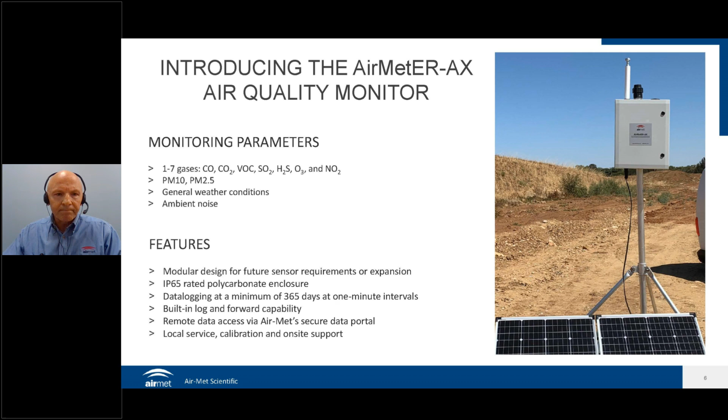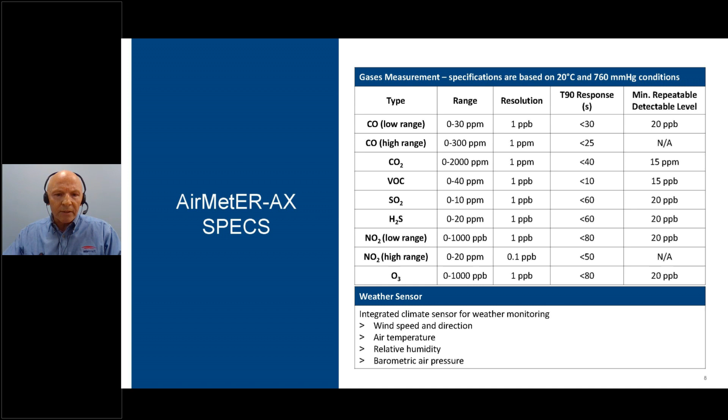Just some key features or aspects of the unit. It features a PM2.5 and PM10 sensor with a range of 0 to 999 micrograms per cubic metre. We also feature a high and low range option for CO and NO2 sensors, amongst the range of various sensors you can see there that are currently available. We can also integrate the weather station and also a noise monitor if required.

The ER-AX is housed in a polycarbonate enclosure which only weighs 11 kilos, so it can easily be mounted on a pole or a tripod, depending on your application. Because the instrument is made and assembled locally here in Melbourne, our customers will benefit from local service and local calibration. So this is going to minimise your downtime and of course minimise the associated costs.

So I'm now going to touch on a couple of case studies. The first case study is a remediation site which is currently operating in Melbourne. I can't go into too much detail in terms of location or other details because it needs to remain confidential. However, to give you an idea, our client's customer is in the process of digging up and removing heavily contaminated soil from a site that was once occupied by a chemical storage facility.

So the concern from our client's customer was the potential migration of the contaminated soil due to the works being carried out on the site. They're worried that this may migrate into the neighbouring community and cause a health and safety problem. So what was required was monitoring of the 4 boundaries for VOCs and particulates. They also required a weather station for wind speed and wind direction.

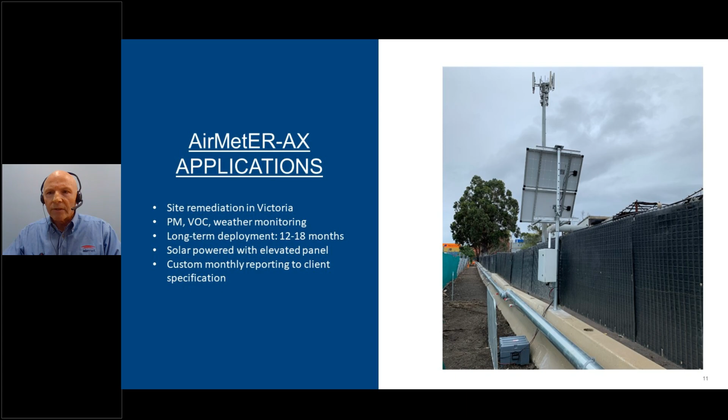I'm an occupational hygienist, although I've done a lot of monitoring over the years and used a lot of remote monitoring stations. But when I was asked to talk about the AirMetER AX, I was delighted to be asked because we've rolled this out on a couple of our sites now very successfully, and I was quite happy to talk about that. Now, the earlier presentation that Peter just spoke about was the use of the AirMetER AX for environmental monitoring applications of a contaminated site, but I want to talk about a slightly different application.

The AirMetER is a very versatile system, and we've been using it for remote real-time monitoring of specific airborne contaminants on construction and infrastructure development sites, where we've essentially been using it as an indicator to assess control measures on those sites. For example, for particulate matter, it can be used to assist with assessing the efficacy of water suppression and/or extraction ventilation systems in dust control.

Now, it's important to note that the data from the remote monitoring stations can't be assessed using workplace exposure standards because it doesn't measure personal exposure. It is measuring levels of contaminants in a general area in which it is located. Personal exposures for comparison with workplace exposure standards can only be estimated by collection of breathing zone air samples from individual operators. Now, the data collected from remote monitoring stations is used in conjunction with control action limits, and the control action limits may reference the workplace exposure standards in their development, but we're not measuring personal exposures.

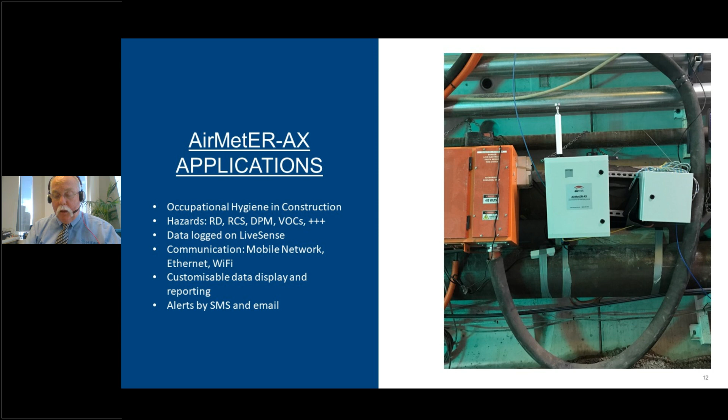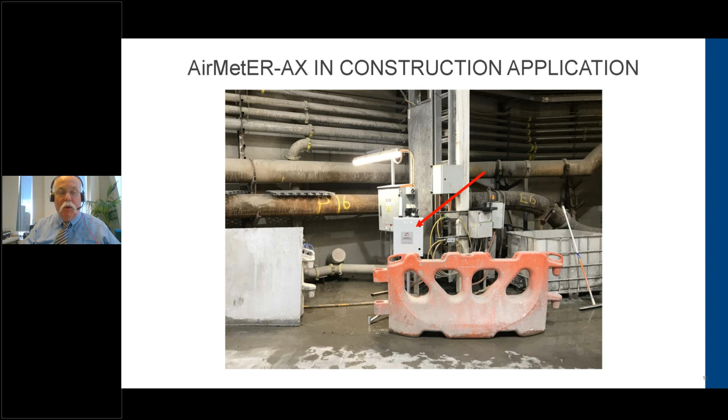So now the system configuration that we're deploying on our projects is particulate matter, PM10 and PM2.5, carbon monoxide, nitrogen dioxide, and a PID or photoionization detector for measuring volatile organic compounds. Now, we're using PM2.5 in the absence of NO2 and CO as a surrogate for estimating respirable dust. Now, before everyone jumps down my throat and says that respirable dust is more than just PM2.5, we understand that, but we are essentially using it as an aid to assist with notification when dust levels are high.

And as the crystalline silica content of the strata is generally known in the materials in which we're working, the respirable crystalline silica content of the PM2.5 dust cloud can also be estimated. And then this is confirmed by parallel sampling using size selective cyclones in accordance with AS 2985 with analysis for RCS by X-ray diffraction.

The size selective cyclone is actually located directly adjacent to the particulate matter inlet on the AirMetER. And we're using PM2.5 in conjunction with NO2 and CO as a surrogate for estimating diesel particulate matter.

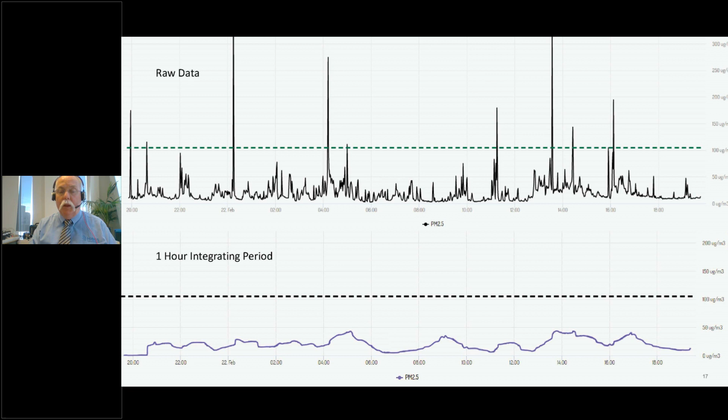So the next thing we are looking at is the same data, except the lower graph shows a 1 hour integrating period, so that it's an ongoing averaging over 1 hour. So you can see that drags the data down quite considerably and well below the action level we've got set there. And then if we change that to a 1 hour integrating period and a 12-hour integrating period, you can see that over these longer shifts, the dust levels are somewhat lower.

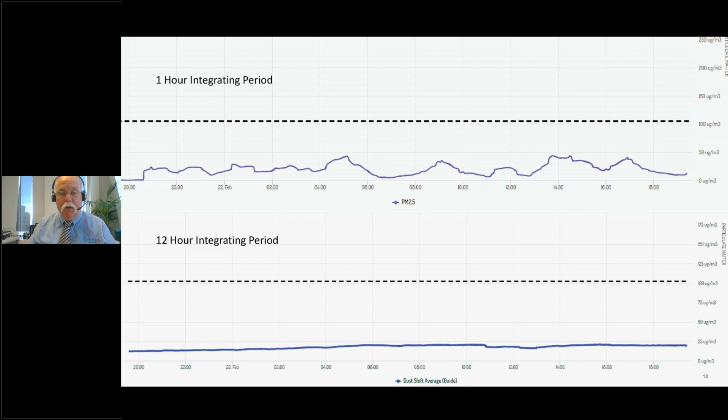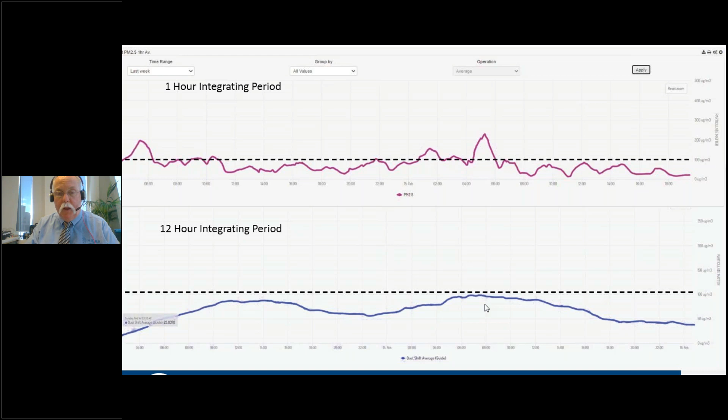However, if we take that graph and we look at it over the 12-hour integrating period, you can see at no time over the 12-hour integrating period did we exceed what would be our action limit. So it's a reasonable assumption that people working in that area, their exposures were being relatively well controlled through the interventions that we were making.

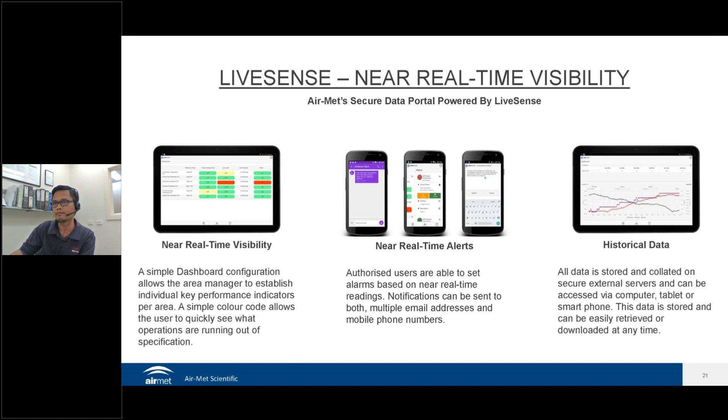So for data and security, the web service allows us to have hierarchical credentials, like an admin, a supervisor or manager, and then a user, so that you could separate the accessibility of the web service.

The data is being hosted in AWS in their Sydney server. So we make sure that the data doesn't live outside Australia, because some customers don't want it going outside the territory. And it's also SSL SSH encryption during transmission, so it's secured.

So basically, you could customize the reporting on it. We support a variety of graphs, like line graph, area graph, wind rose for wind speed and direction. You could do a customizable report, and then threshold alert management via SMS and email as well.

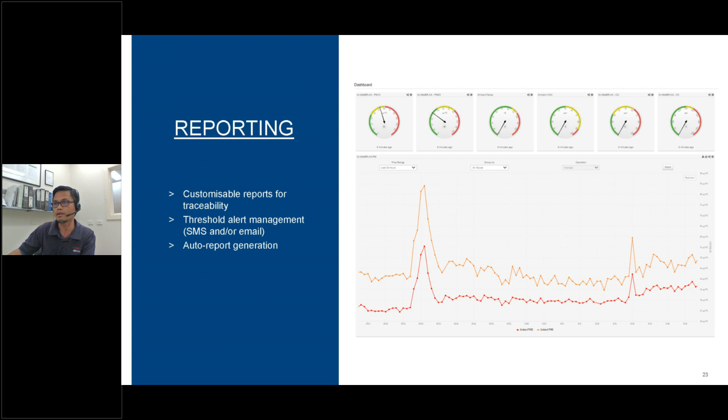We're not yet done with developing the unit. Actually, we're in the process of working with the Department of Transportation to deploy the black carbon, or the particle size less than PM1, the ultraviolet detection for black carbon. We're very near on making that happen. We're working with the Department of Transport, as I mentioned, and also we'll be deploying a vibration sensor alongside the E-RAX by Q4 of 2021, and also the ultrafine particles.

So we're continuously developing the instrument for other applications, or for any application that you may have. And also the platform is so flexible. As mentioned, we have high CO, low CO detection, because we can change the sensor within it. We're very flexible. At the same time, on the web service, if you have some special report, you require some modification in it, we can do that on the back end.